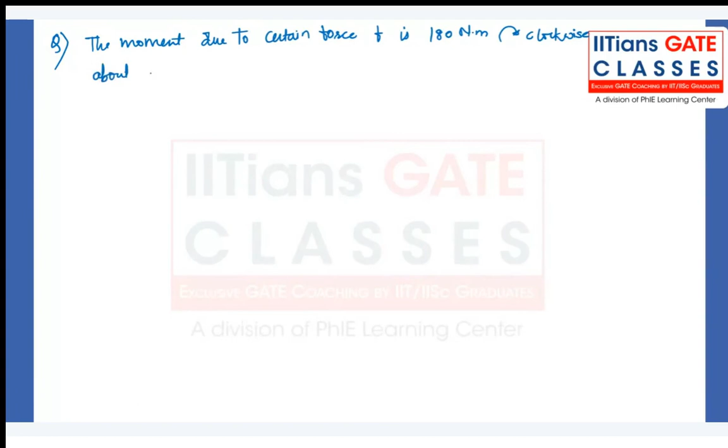Let's take some questions. The moment due to certain force F is 180 Newton meter clockwise about origin, and 90 Newton meter counterclockwise about B, as shown in the figure.

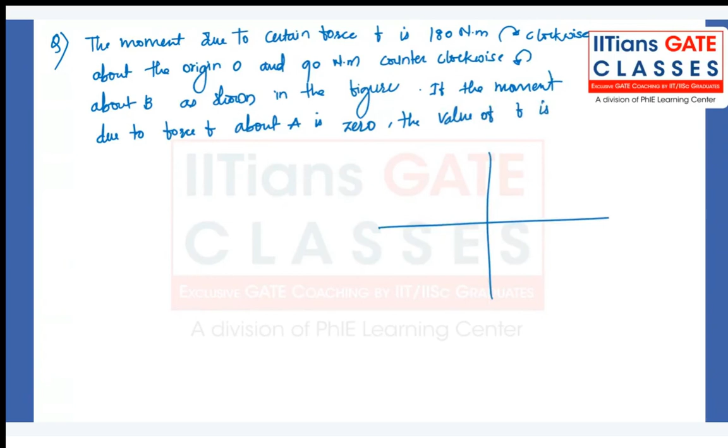If the moment due to force F about A is 0, the value of F is... this is the question, and the figure looks something like this. We have point A here, the origin here, this is the x-axis, this is the y-axis, and point B is somewhere here. B is at a distance of around 6 meters, and A is at a distance of around 3 meters.

I hope with this information you will be able to solve it. Go through the inputs, try to understand the question, and if possible try to draw the figure here to see how force F will look like, where it will be in this figure. Then the problem will be very easy for you.

What they have given is: moment about origin is 180 Newton meter clockwise, moment about point B is 90 Newton meter counterclockwise, and moment about A because of the force is 0. Can you tell me when the moment will be 0? What is the significance of this last input, that moment about A is 0?

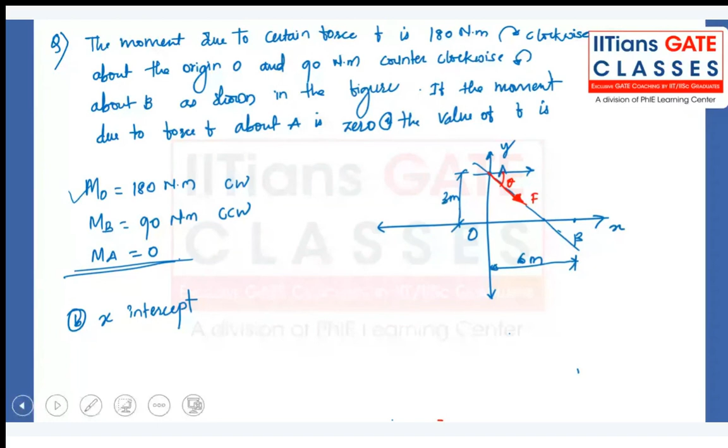What will be the components of this F? The horizontal component will be F cos theta, the vertical component will be F sine theta.

This 180 Newton meter about origin will be because of the horizontal component only, right? So F cos theta, or the horizontal component, let's call it Fx, and this as Fy. So I can say Fx into 3 is equal to 180. And what is this 90?

90 Newton meter is created because of this vertical force Fy, so we should write it as Fy into 6. Then only we'll have the - so if this Fy force, which is acting at 6 meters away from point B, is creating a counterclockwise moment, right? So yeah, that's all.

Yes, also what else have they given? Anything else? Use these inputs and try to solve the problem now.

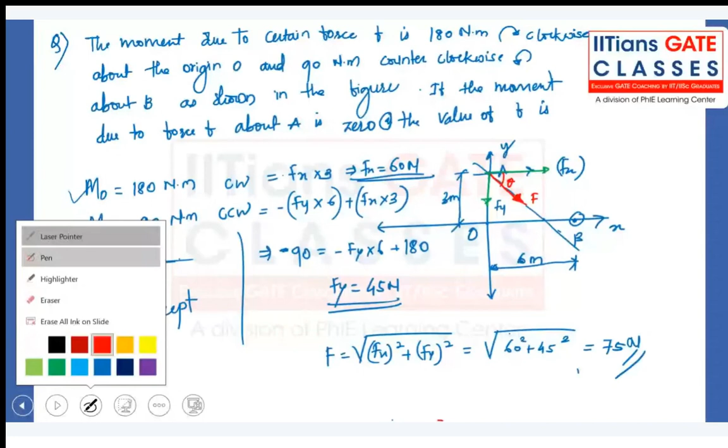Aman, have you understood that the force should pass through point A? Is it clear till this? Yes, okay. Then if you read the question again, what it is saying: the moment due to that force is 180 Newton meter clockwise. So in order to create a clockwise moment about origin, this force has to be on the right hand side of the vertical plane, right? This should be somewhere here, here, or here, right? Then only it will create a clockwise moment about origin. Do you agree till this?

Now, one more sentence they have mentioned: 90 Newton meter counterclockwise moment about point B. So this force has to create a counterclockwise moment about B. Means the line of action of this force should be on the left side of B. If it is on the right hand side of B, what will happen? It will create a clockwise moment. That's why the line of action of the force F should pass through the line joining origin and B. Then only that force will create a clockwise moment about O and counterclockwise moment about B. Is it clear now?

Yes, okay. Now, look at the given. So what I did is I just randomly put F with a theta angle, and Fx and Fy are the horizontal and vertical components of that force. So Fx will create a moment about origin, which is causing 180 Newton meter.

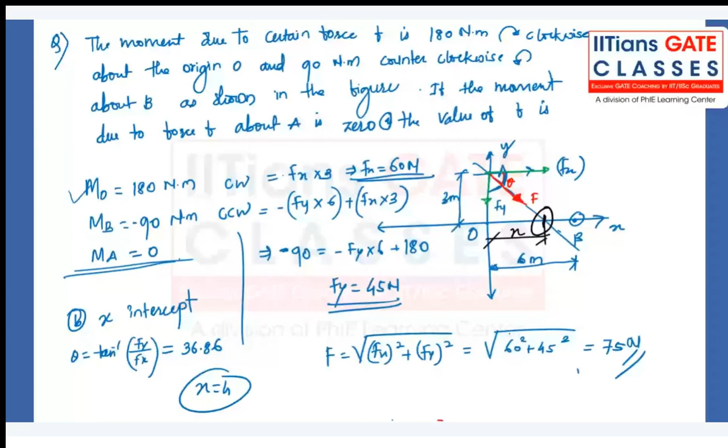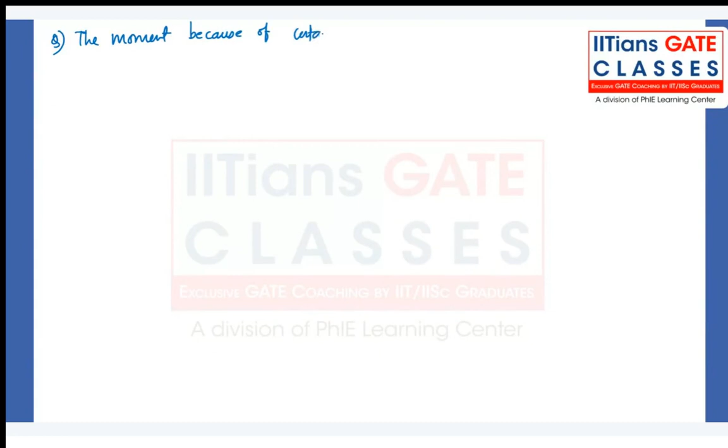Simple, very simple question, 1 mark question. The moment due to a certain force P of 500 Newton with respect to the origin, as shown in figure.

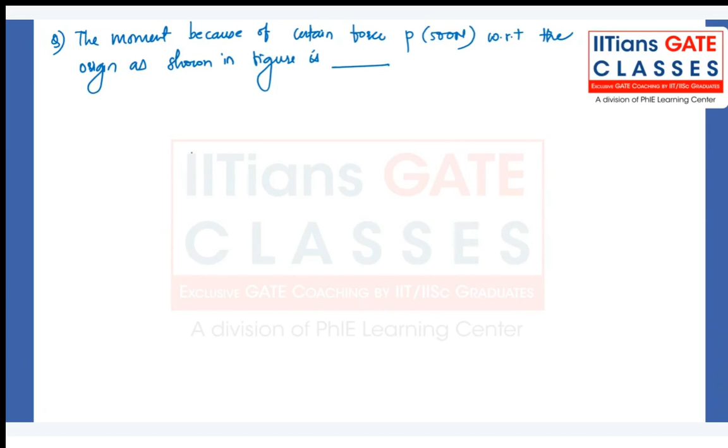Is okay, you have to type the answer. So this is how the figure looks. This is the force, which is 500 Newton, and this is 5 meter.

No, sorry, not this. Let's take it like this. Okay, this is another question I'll write here. Yeah, take this as 5. So find y-intercept.

Okay. Very simple question. We got a force of 500 Newton, making an angle 45 degree with horizontal. What is the moment because of this force P with respect to origin? Quickly tell me the answer.

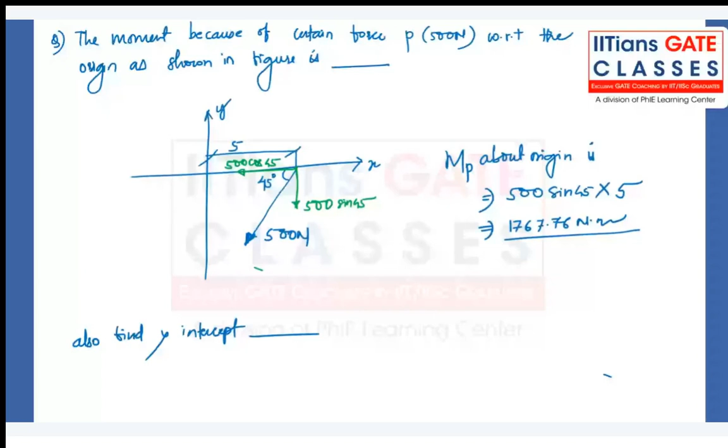Very simple. Means where it will be at the y-axis. That's yes, correct, it's minus 5. It will be this distance, basically minus 5, because this angle is 90, means this also has to be 45, right?

And it means these two sides are of same length. Okay, is it clear to everyone? Any doubt in this question? Feel free to ask, you can directly ask me or you can type your question.

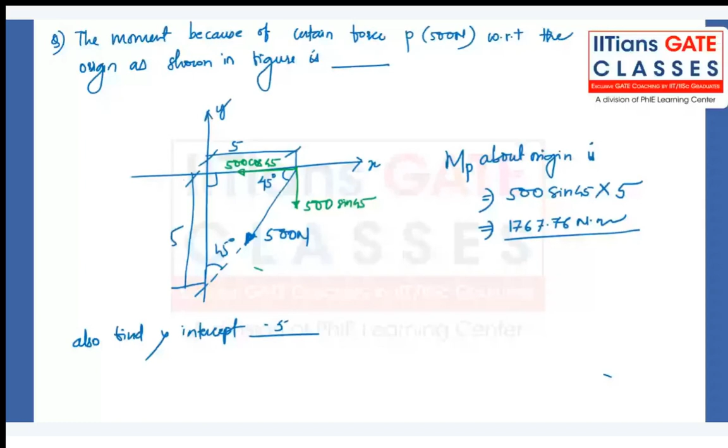Okay, we got one question. Referring to the figure below, if F1 is equal to F2 is equal to 30 Newton, determine the angles theta and phi, so that the resultant force is directed along the positive x-axis and has a magnitude

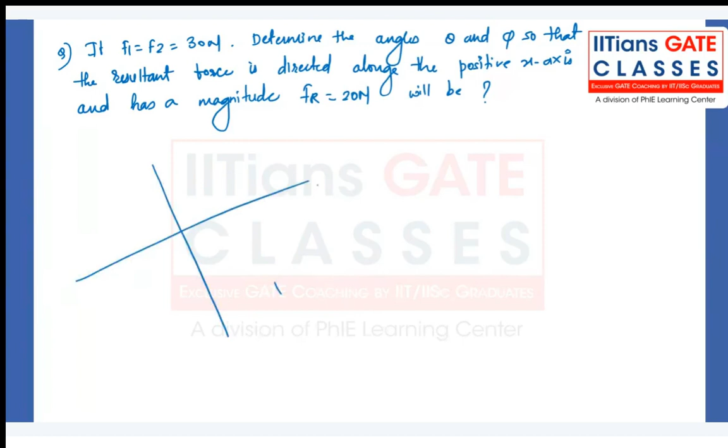of 20 Newton. Okay, figure looks something like this. This is the coordinate axis x and y. You got one force here, theta, phi, 30 Newton, 30 Newton. Okay, I'll not give options to you. You should try to solve it directly.

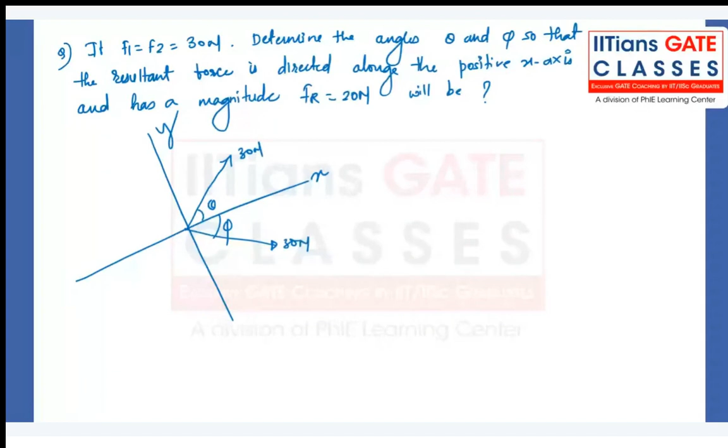So I'll repeat to help you understand. Determine the angles theta and phi so that the resultant force is directed along the positive x-axis. So what they are saying is the magnitude of the resultant is 20 Newton. Okay, this is the given data. So I think 70 point, yeah, close to 70.5 degrees is the correct answer.

Correct, Abhishek. If you look into the question, 30 Newton is the force, right? Both are same, right? Because if forces are same and the resultant is along the x-axis, it means their angles has to be same because of the symmetry in this figure, right? If these two numbers are different, then there is a chance that angles will be different. But now the numbers are same, means angles are also same.

So if you take the component of this 30 Newton about the x-axis, it will be 30 cos of theta plus 30 cos of phi, and that is equal to 20. But as I said, theta is equal to phi, so we can write it as 2 times 30 cos of theta equal to 20. So 30 cos of theta is equal to 10, cos of theta is equal to 1 by 3, and theta is equal to 70.5, I guess, around. Okay, just check 70 point something. Okay, and yeah, this is the final answer.

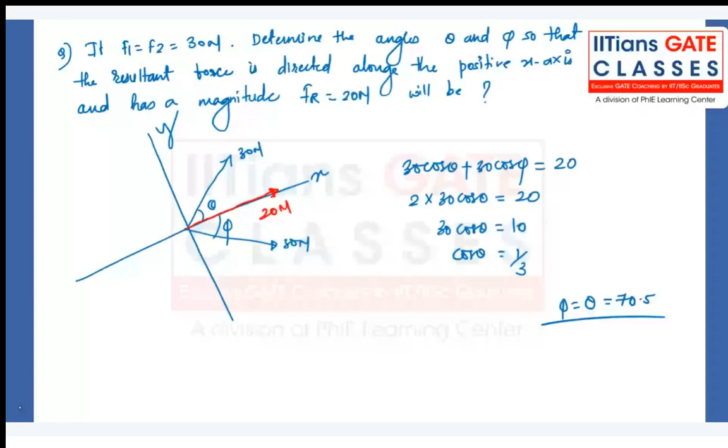A 300 Newton box is held at rest on a smooth inclined surface by a force P, making an angle of 45 degree with the inclination, as shown in the figure.

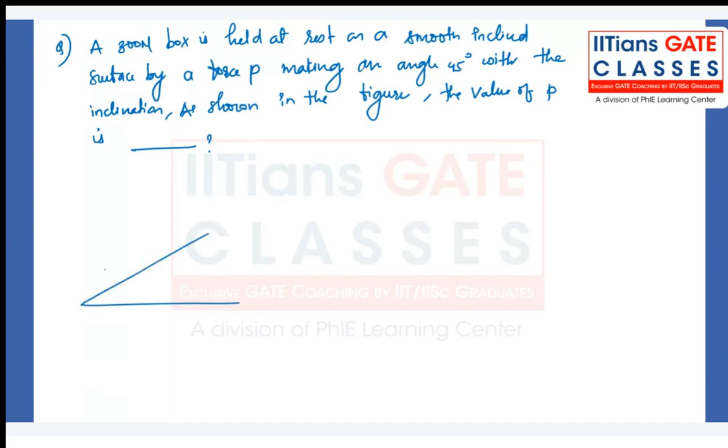Okay, the value of P is... let me draw the figure. So this is 30 degrees, and we got one box here of 300 Newton, and with respect to this we are applying force at 45 degrees. This is the P force, and this angle is 45. Okay, this is the input to you.

Okay, solve it. It is given to you, Sonali. 30 degrees is given to you. 30 degree is the inclination, and 45 degree is the angle of the force with respect to the inclination.

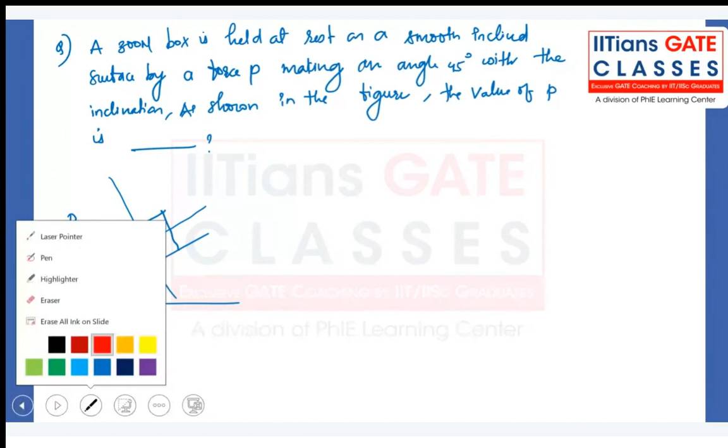Okay, the main forces are like this, P and the weight of the block. So if you solve this, yes, 212.13 is the correct answer. If this is 30, this has to be 30. Why? Because if the angle between two lines is 30 degree, the angle between their perpendiculars is also 30 degree.

Use another pen. This is also 30. So this is W cos of 30, and this is W sine of 30. Okay, then this P will also create two components: P sine of 45 and one component here P cos of 45.

Okay, and what we are saying here is the box is held at rest, meaning it is in equilibrium. So summation of all horizontal forces and summation of all vertical forces has to be zero. So summation of all horizontal forces is 0.

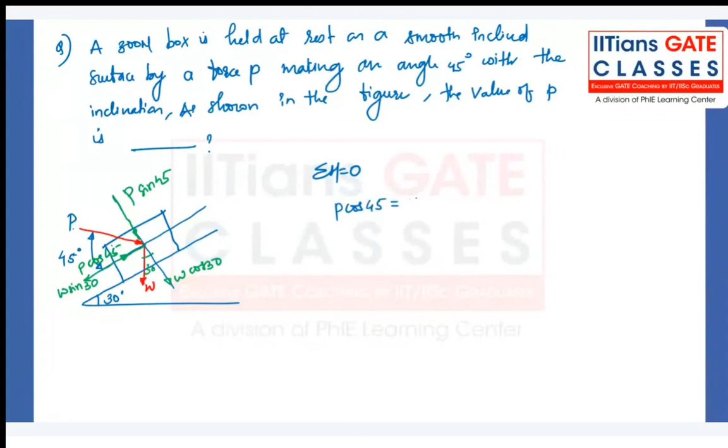So summation of all horizontal forces means what? P cos of 45 is equal to W sine of 30. So we have to calculate the P value, and W value is 300. So 300 sine of 30, that's all. Sine 30 is 1 by 2, so P cos of 45 is equal to 150. So you'll get the value of P.

Okay, can I move towards the next slide? Is it clear?

Okay, let's take another question. We are starting with simple questions. Later on I'll bring a little more complexity to it.

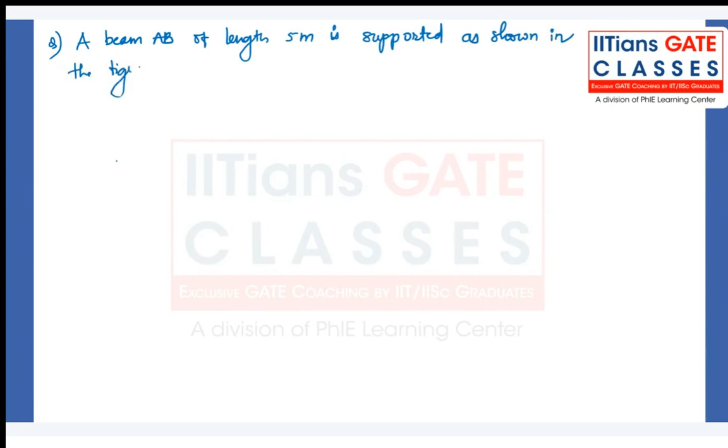So beam AB may be of length 5 meter is supported as shown in the figure, and subjected to the forces at its two ends, A and B. The reactions at the support C and D respectively are...

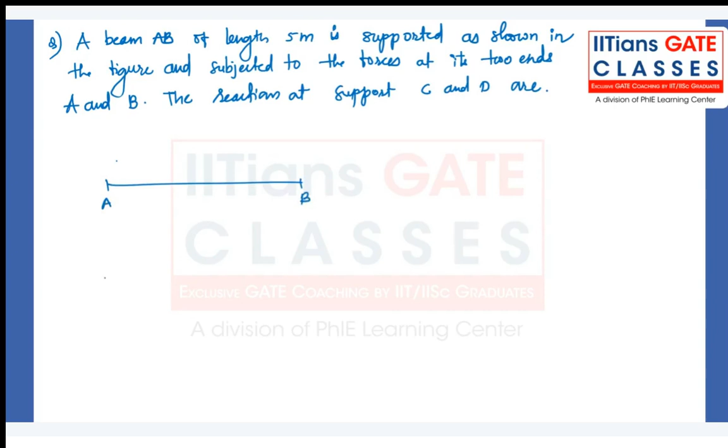Okay, so they have given a beam A, B, and the length of the beam is 5 meter, supported at both the ends. 600 Newton, 600 Newton, and subjected to the forces. Okay, so these are the forces, not the support. We have some supports at point C and D.

Okay, I'll repeat the question. We got a beam AB of 5 meter length is supported as shown in the figure. C and D are the support points and subjected to the forces at the ends. So at point A and B, these are the ends of this beam, and we can clearly see 600 Newton is upward force at A, 600 Newton is downward force at B. The reaction at support C and D are, okay, we are supposed to calculate the reactions at C and D.

Okay, S1 and S2 are the supports, first and second. Yes, distance between C and D is 3 meter.

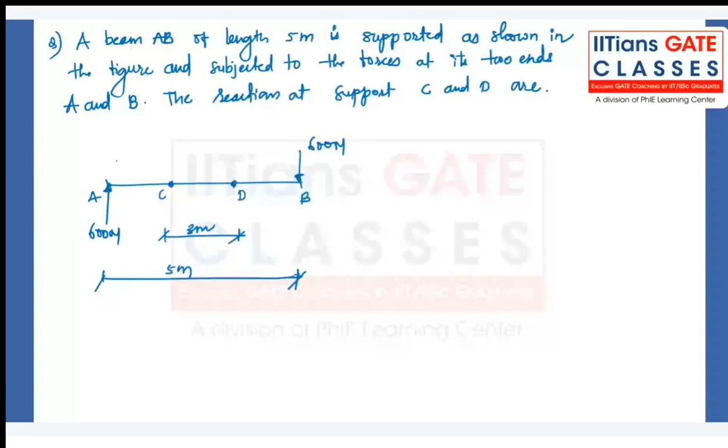See, if you consider the reactions like this, what will happen? Apply the equations of equilibrium, what we'll get is summation of all vertical forces has to be 0, right? Yes, Abhishek, correct answer. So 600 plus reaction at C plus reaction at D minus 600 is equal to 0 as per the equation of equilibrium. So what does it mean? RC has to be equal to RD. The reaction at C and reaction at D has to be equal, but the direction... you can clearly see RC is equal to minus RD, or plus RD. So what should be the value or direction of them? Is it correct if I write it like this? Yes or no?

No, it is incorrect because in this case it will be unbalanced. Both of them will create a clockwise couple, so it is not in equilibrium. The correct figure should be like this.

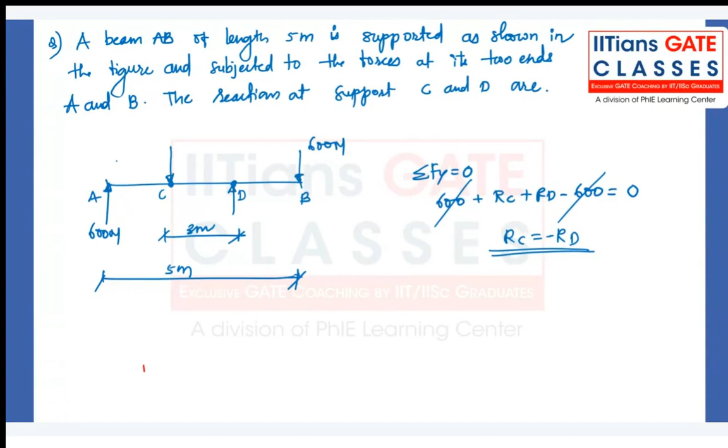So in short, the clockwise couple created by A and B should be equal to the counterclockwise couple created by C and D. Then only this is in equilibrium.

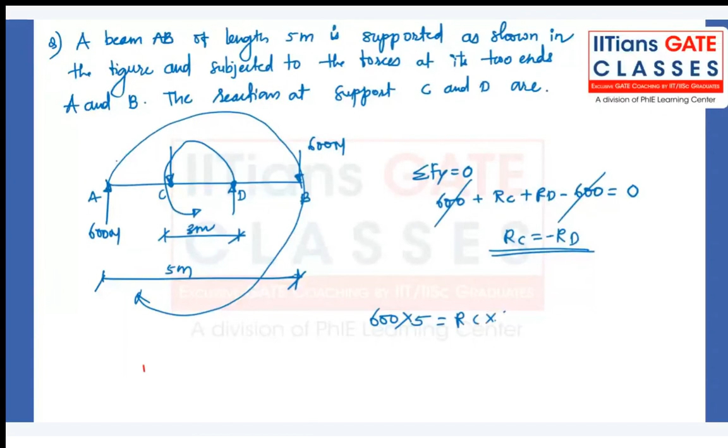Do you agree? So what is the clockwise couple created by forces at point A and B? 600 into 5, and it is equal to the counterclockwise couple created by the reactions at C and D, that is RC into 3 or RD into 3. Hence, the reaction, let's call it general R, is 1000.

RC is downward and RD is upward. RC is 1000 downward and RD is 1000 upward. So the correct answer is 1000.

You should directly type 1000 if the question comes without options. If the question comes with options, you can choose accordingly. Any doubt in this question? Is it clear to you all?

Let's solve some more questions related to beams quickly. All these are previous year questions, mainly 1 mark each.

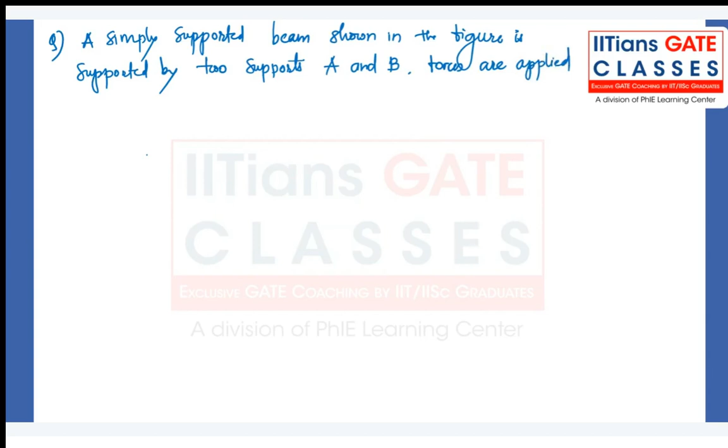A simply supported beam shown in the figure is supported by two supports, A and B. Forces are applied as shown in the figure. Determine the reactions at the supports.

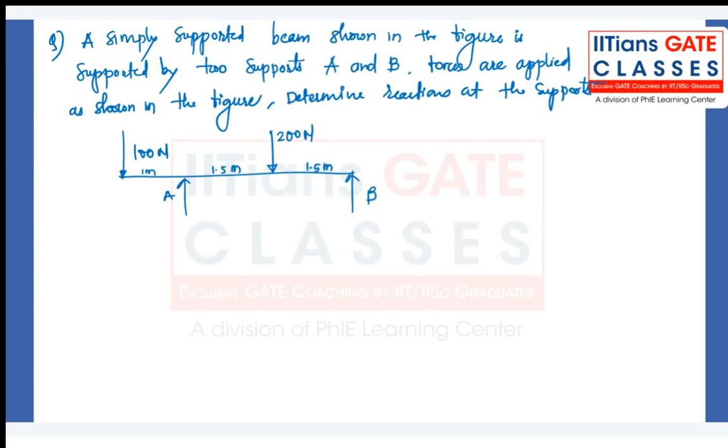Use this input data and figure and try to solve the question quickly. Tell me the value of RA and RB.

A simply supported beam shown in the figure is supported by two supports A and B, and forces are applied as shown in the figure. Distances are also given to you. I don't think this is a difficult problem. Apply the equations of equilibrium.

Summation of all vertical forces has to be equal to 0, right? So RA plus RB is equal to 300, which means 100 plus 200. Write it as equation number 1. Horizontal forces are not there, so you don't need to use that equation of equilibrium.

As the force system here is coplanar non-concurrent, you can also apply moment equations. If you take moment about point A, moment about point A is 0: 100 into 1 is creating a counterclockwise moment about point A, plus 200 into 1.5 is a clockwise moment, and that is equal to reaction at point B into 3.

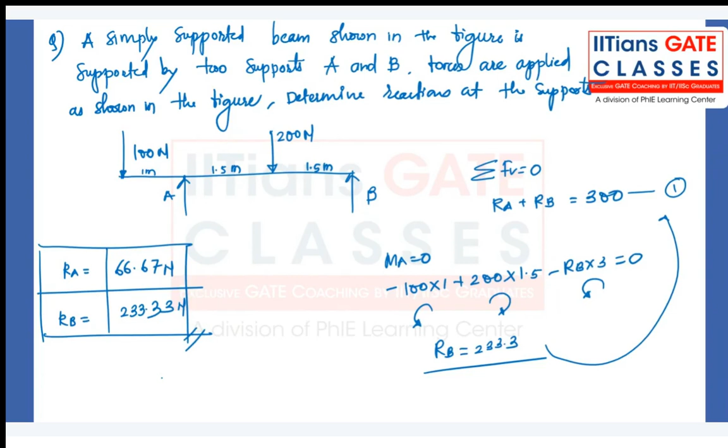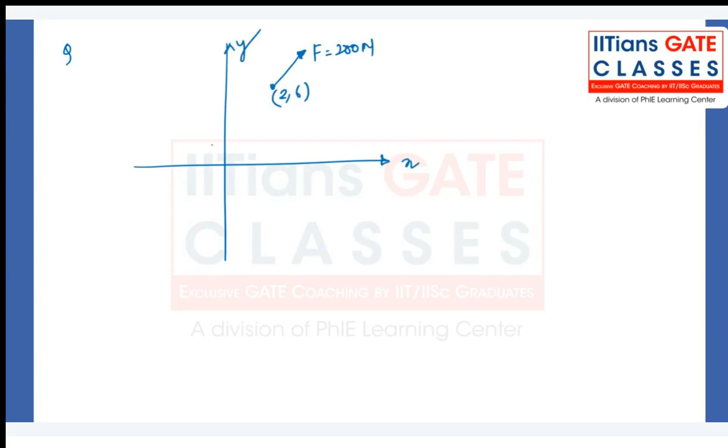One more simple question: determine the moment because of force F about the origin. This is the question.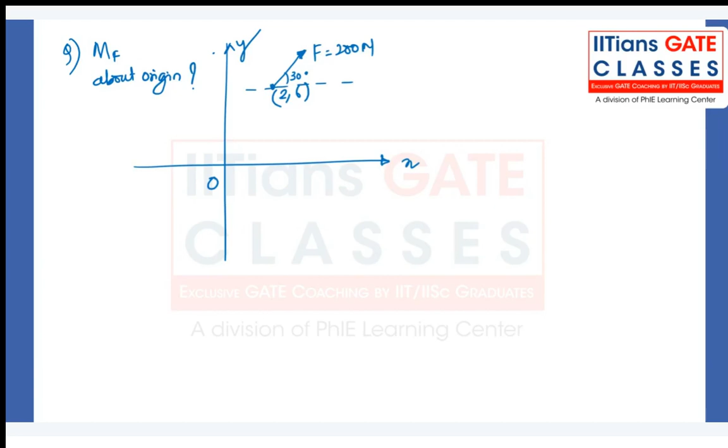You are talking about the previous question, Kanishk. Let's first finish this question and then I'll come to you. Let's solve this first question.

So here the question is the moment because of the force F about the origin. That force is making an angle of 30 degrees with the horizontal, which is at a distance of 2 meters from the origin towards the x-axis and 6 meters from the origin towards the y-axis. Can you tell me the answer?

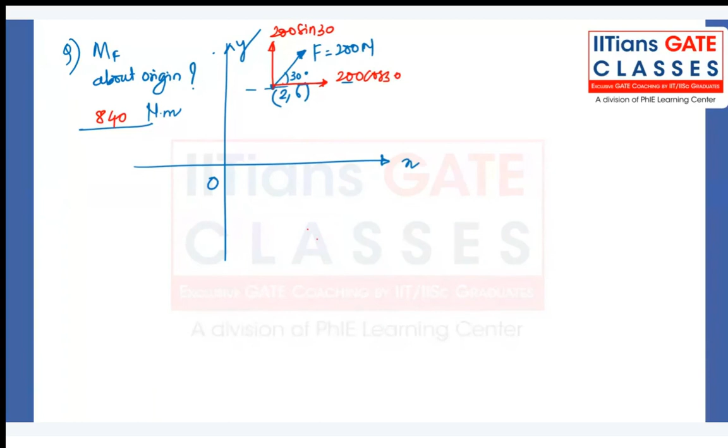Yes, 840 is the correct answer. See, the component of F about the horizontal axis is 200 cos of 30, and we have 200 sin of 30. So the moment because of this about origin is 200 cos of 30 into 6, creating a clockwise moment, minus 200 sin 30 into 6.

You should get 840 Newton meter. I hope it's clear to you all. Can I move to the next slide? Any doubt in this question?

Sorry, it's mistakenly written as 6, it should be 2. Is it correct? Yes, right. Thanks, Sonali.

200 sine, 200 cos of 30: the perpendicular distance for that is 6, and for this force the perpendicular distance is 2. I hope it's clear now.

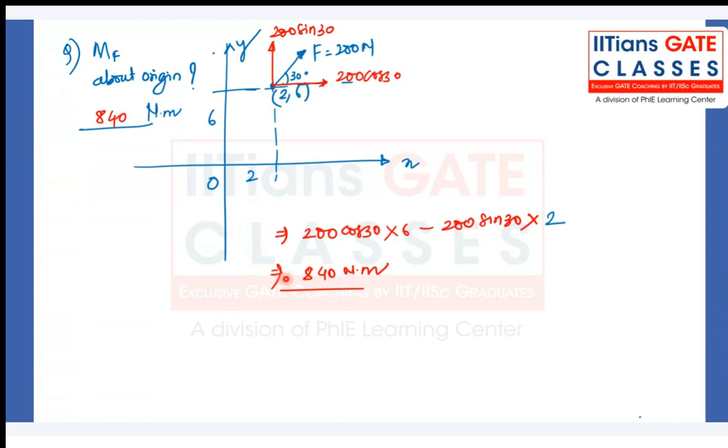Yes, okay. Let's take a question. This is a little bit of a big question. I'll not write it completely, I'll read it and you try to write it. Just the main points, no need to write all the things. Okay, a block of weight

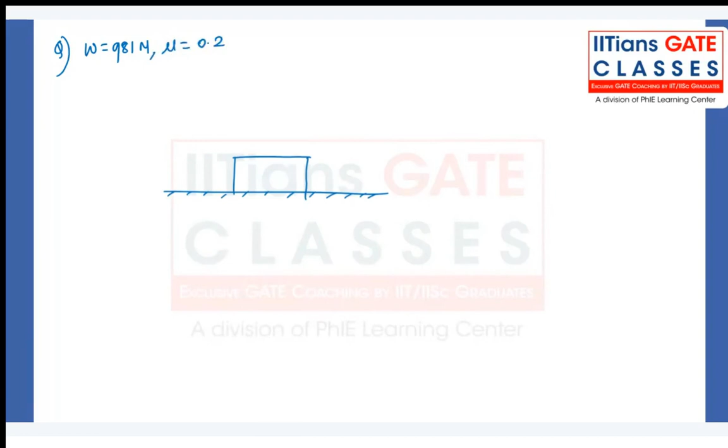981 Newton is resting on a surface as shown in the figure. The coefficient of friction between the block and horizontal surface is 0.2. The vertical cable is attached to the block, providing a partial support as shown in the figure. So we got a cable attached to the block vertically as shown in the figure in order to provide the partial support.

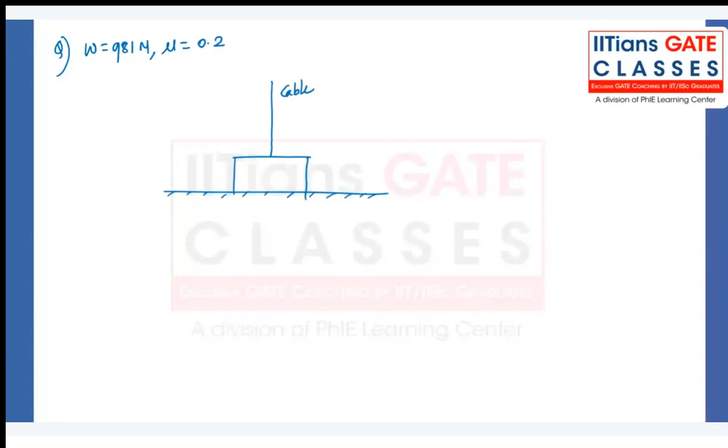A man is pulling the block horizontally with a force of 100 Newton. What will be the tension in Newton in the cable if the man is just able to move the block towards right.

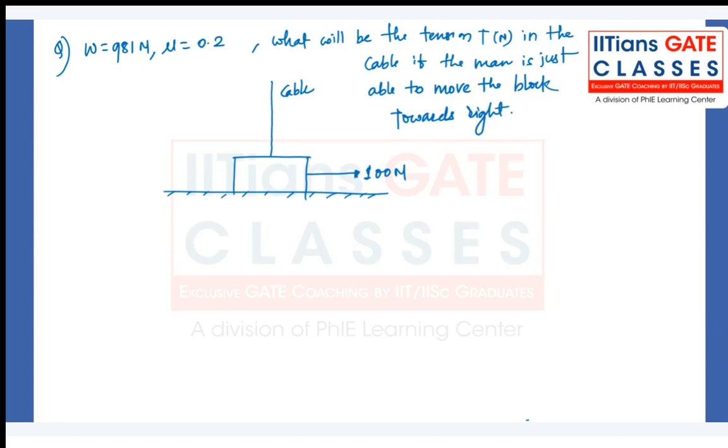Okay, I'll repeat the question, listen carefully. We have a block weighing 981 Newton resting on a surface. The coefficient of friction between the block and the horizontal surface is 0.2. We have attached a vertical cable, which is providing partial support as shown in the figure. And a man is pulling the block horizontally with a force of 100 Newton as shown in this figure. What will be the tension in Newton in the cable if the man is just able to move the block towards right? Is this question clear to you all?

Yeah, okay. So what is the benefit of this cable? Cable is providing partial support. If the cable is not there, then what will happen? We have to apply more force in order to move the block. And what is its value? It's clear cut, the value will be mu into n, right, because the friction force will be mu into n.

So 981 into... assume that you don't have the cable for the time being, just to explain you this concept in more detail. Assume that you don't have the cable here, so only we have one force acting towards the right hand side in order to move the block. So can, in that case, will that be 100 Newton or more than that? Okay, this is a force F.

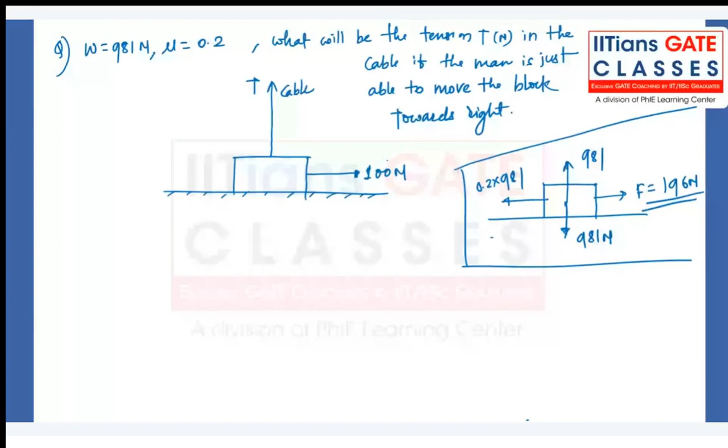But in this question we are attaching a cable, and that is helping us to give partial support. So we don't need 196, you don't have to apply 196 Newton force in order to move the block towards right, 100 Newton force is sufficient. Okay, so given that, you have to calculate the tension in the cable. No, Sonali, it is not given as 196, I am helping you understand what is the benefit of the cable here, what value the cable is adding.

Okay, see, if you don't have the cable, then this is the situation: in order to move the block, you have to apply force more than 196. But in our question, 100 Newton force is just sufficient to move the block because of the partial support provided by the cable. So this is just to help you understand the question and calculate the value of tension in the string.

Yes, Abhishek, your answer is correct, 481 is the correct answer. If you draw the free body diagram, we got tension, we got the normal reaction in the upward direction, and we got 981 Newton weight in the downward direction. We got 100 Newton force in the rightward direction, and we got a frictional force F in the left direction. Okay, so let me write that.

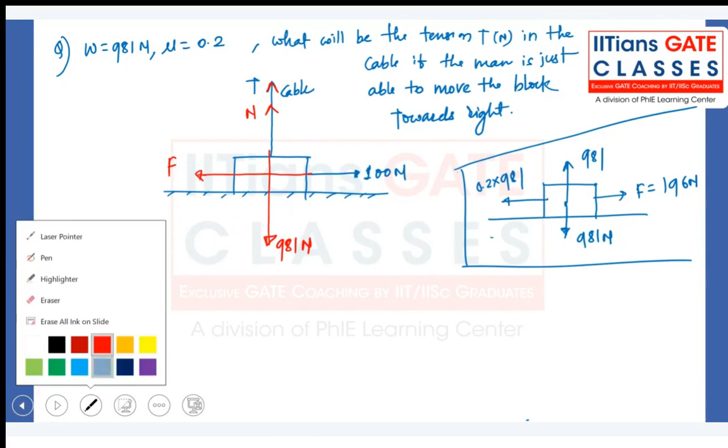Sham is asking how tension is helping to move the block right. If the block has a weight of 981 Newton, its normal reaction will also be 981 Newton. Do you agree?

So if 981 is the normal reaction, the frictional force will be 0.2 into 981. Is it correct? And the value of this is what? 0.2 into 981 is 196.

So it means you need at least 196 Newton force in order to move the block towards right if the string, or the cable, is not there.

But now if we are attaching a cable to the block, they are saying that 100 Newton force is just sufficient to move the block because the cable is lifting the block slightly upward. Because of that, the frictional force between the surface and the block will reduce. Is it correct? Are you following?

Let me explain how I calculate the value of frictional force in this case. What is the value of n? If you do the summation of all vertical forces equal to 0, T plus n equals 981 Newton. And what is the value of n here?

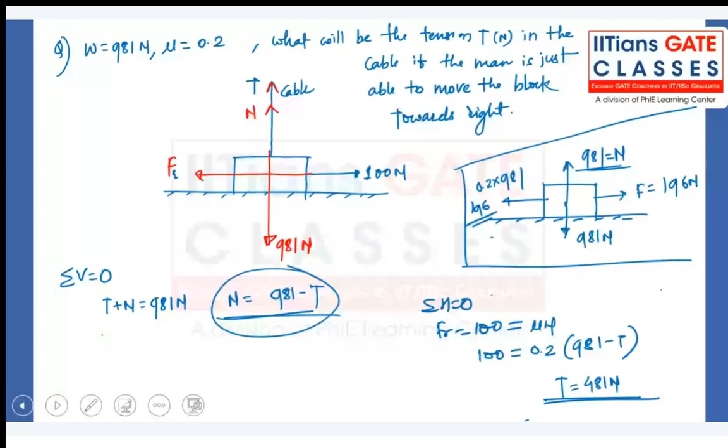Okay. No problem, Sonali, it's good that you understood it. If a similar question you get in future, you know how to deal with it, right? So no need to worry.

Let me give you some more questions. A little bit difficult, I try to think on it. Okay, just for your understanding.

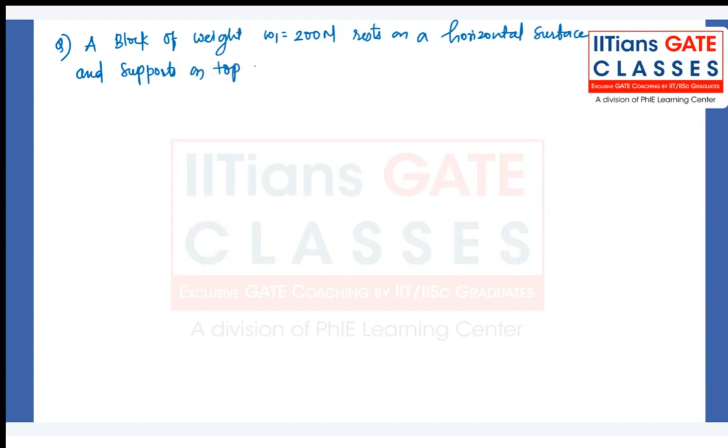A block of weight W1 equal to 200 Newton rests on a horizontal surface and supports on top of it another block of weight W2 equal to 50 Newton.

As shown in the figure, let me explain. We have one block, and we have one more block on top. W1 is equal to 200 Newton, W2 is equal to 50 Newton.

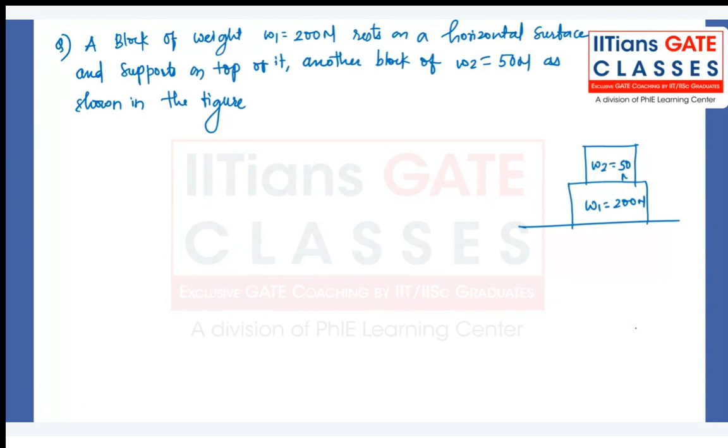The block W2 is attached to a vertical wall by an inclined thread AB.

The magnitude of the horizontal force applied to the lower block, as shown in the figure, that will be necessary to cause slipping is...

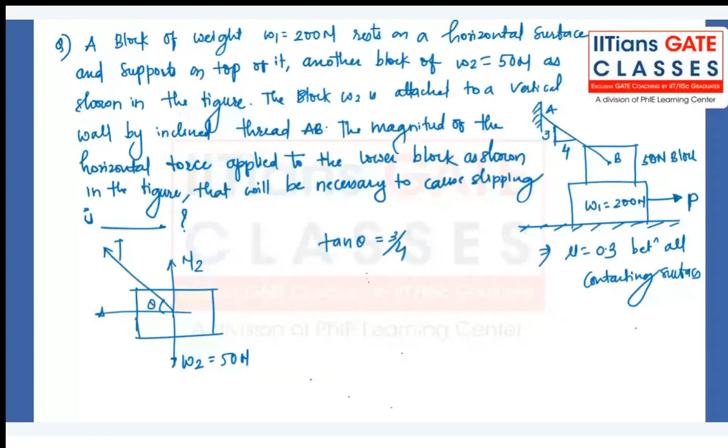Because it's a second block, we have one string in this direction, which is making an theta degree with the horizontal. So the horizontal component of that tension will be Tx and vertical will be Ty. And this theta you can calculate. Tan of theta is equal to 3/4. So theta is equal to tan inverse of 3/4, and that is 36.86 something you'll get.

Okay, now directly I will write the components, not the T, so you will understand it clearly. So this is T sine of 36.86, the component of tension in the vertical direction. The tension component in horizontal direction is T cos of 36.86.

See, because of this force P, the block will move towards right. So the frictional force on this block in this direction, do you agree? In the block of weight W1. But on block B, which is our second block, of weight W2, which is equal to 50 Newton, frictional force will be in this direction, because W1 and W2 are connected. So in that case, the frictional force is in the right hand side direction. So here, the frictional force I should write towards right hand side, and that is, let's call it F2. F2 is the frictional force between the blocks W1 and W2.

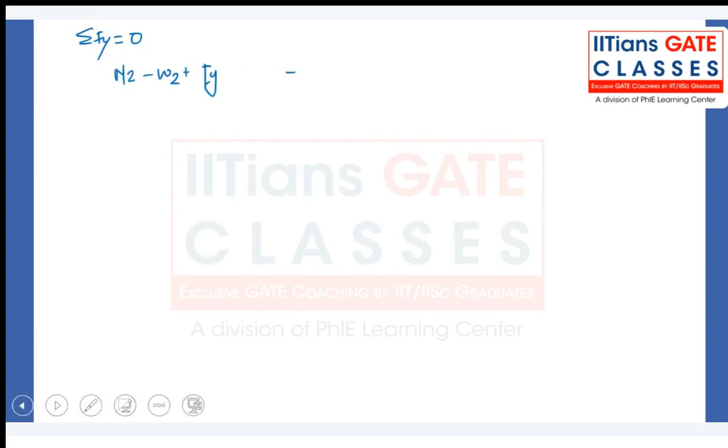Is equal to 0. N2 minus W2 is 50. Ty is T sine of 36.86, so it is 0.6 times T is equal to 0. So from this you will get a relationship. Okay, let's keep it as it is for the time being. Call it equation number 1.

Okay, we got a question from Harsh about friction again. Okay, so I'll repeat, Harsh. So this is one block, and this is another block we are keeping on it. You are able to move this block, and this is your surface. If you are able to move this block in the horizontal direction, the frictional force on the block will be in this direction. Do you agree?

Now focus on these two blocks, forget about this one. This block is moving in the right hand side direction now. So what will be the frictional force on this block? See, on this block it is in this direction, but on this block, slip is occurring meaning the block on the downward side is moving in the right hand side direction, and the upward block moves in the left hand side direction, right? So in order to have balance, your frictional force here is in this direction. Okay, so the magnitude will be same, just the direction will change depending on which free body diagram you are considering. Yep.

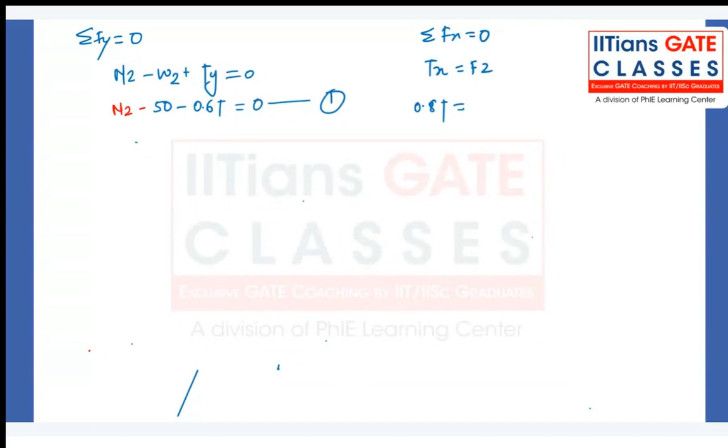And what is F2? F2 is mu times N, and the N we already got. So N2 is what? N2 is 50, sorry, this is minus 0.6T, right? So F2 is 0.3 into 50 minus 0.6T. Okay, 50 minus 0.6T Newton. 0.8 T is equal to 0.3 into 50 minus 0.6 times T.

So if you solve this, you will get the value of tension, 15.3 Newton. And if you put it into this equation, you will get the value of N2, and that is 40.8 Newton. And if you know N2, you will get F2 as well. So that is 0.3 into N2, and that is 12.24 Newton.

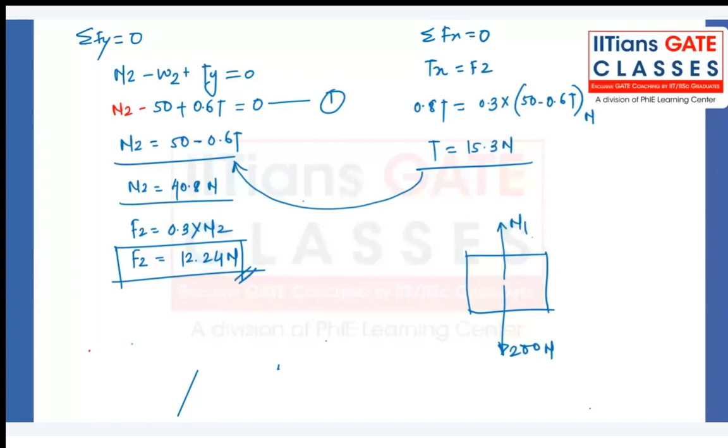Now we can proceed towards the free body diagram of the bigger block, which is 200 Newton weight. Here you will have a normal reaction N1. Also, the weight of the block which is kept on this will create again one reaction. Let's call it N2.

We have one force which is horizontal, that is P. Because of this, we have F1 force. With respect to the surface, we have frictional force F1 in this direction, and friction between the blocks will be F2, in this direction. So this is the free body diagram of the block at the bottom, the bigger block.

From this we got the value of F2. We don't know the value of F1 here. You know the value of N2, that is 40.8 Newton. You can calculate the value of N1 from this. If you apply summation of all vertical forces equal to 0, N1 you will get as 200 plus N2, so that is 240.8. So if N1 is 240.8, F1 is calculated using that, and that is equal to 72.24.

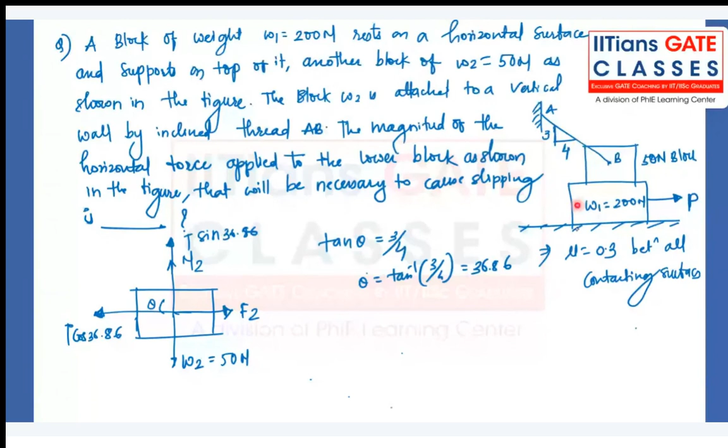Why will it not create full 50 Newton? Because it is attached to a string, so the whole 50 Newton force will not be applied fully on block W1. Some part of it will come here because of the string. If the string is not there, then the whole 50 Newton reaction will be applied by block B on block A.

So that is the reason N2 is 40.8, which is the reaction of the smaller block on this bigger block, and N1 is the reaction because of the ground on the bigger block. So I hope you understood 200 Newton, N1 and N2 direction. P is also given to you, already given in the figure. So if the block is moving in the rightward direction, the frictional forces will be in the leftward direction, and that's why F1 and F2 are in the opposite direction to it.

Shrujana, is it clear to you? So from the first calculation we got the value of F2, and here we are calculating F1 and just adding them to get the value of P. I hope it is clear to you all. A little bit difficult, but if conceptually it is clear to you, you may not face any issues in future. Any doubt, feel free to ask.

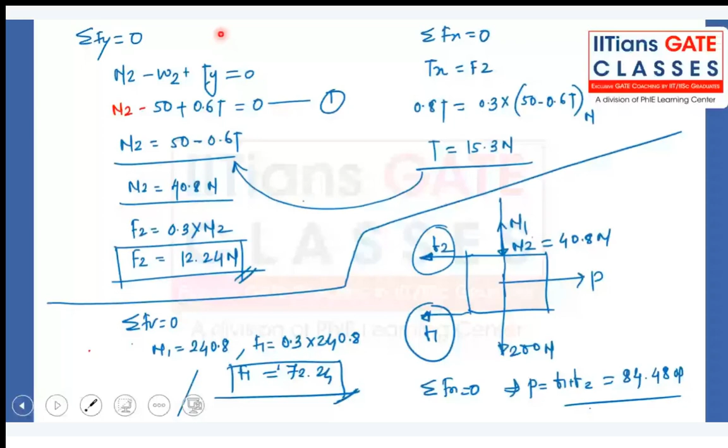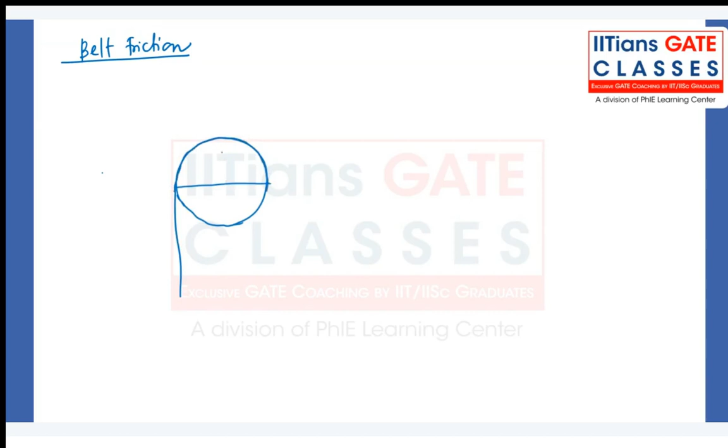A little bit of theory I'll explain here: belt friction. I have explained all the friction part, but this small part remains. Suppose you have a pulley, and a belt is wrapped from this pulley like this, with T1 and T2. How to find T1 and T2?

T1 is the high tension side and T2 is the low tension side. If this pulley is rotating in the counterclockwise direction, the arrow indicates the high tension side. If it is rotating in the clockwise direction, then the arrow will indicate the high tension side. So whichever direction it rotates, that side is higher. Assume here it is rotating counterclockwise, so T1 is the high tension side and T2 is the low tension side. So T1 by T2, you know this relation.

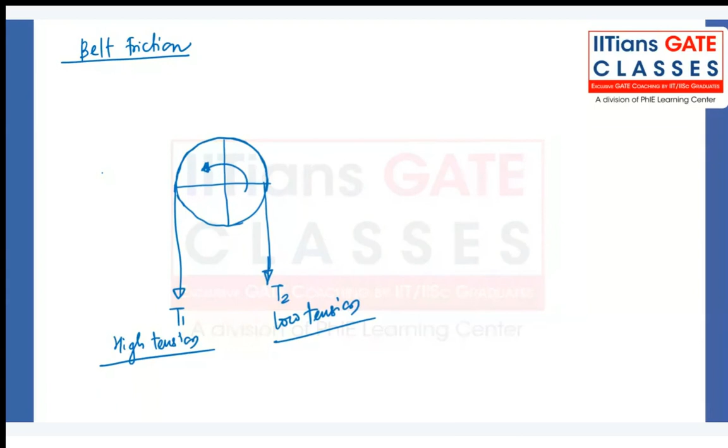That is what I'm trying to explain here: how the ratio of T1 and T2 is related to each other. Tension on the high tension side divided by the tension on the low tension side is equal to e to the power mu times beta, where T2 and T1 you already know. The value of mu is the coefficient of friction between the belt and the pulley, and beta is the angle of contact.

Let's call it beta, angle of contact, or you can also call it the lap angle. Okay, in radians.

So in this question, what is the angle of contact? It is complete 180 degrees, right? So this is the total angle of contact. So entire 180 degrees, this belt is in contact with the pulley. That's why in this case, I will say pi is the angle of contact for this figure.

But if you get this kind of figure, in this case you may have lesser contact, let's say maybe 90 degrees or so. Is it clear? Is this part clear?

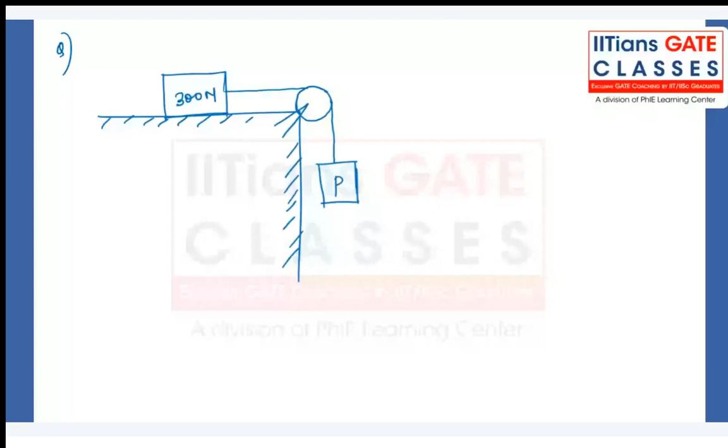Can you calculate the value of P here? Consider the coefficient of friction is 0.3. Lap angle is 90 degrees. And find the value of P. The coefficient of friction is 0.3 for all contacting surfaces.

Direction of motion, obviously we are not applying any force to the horizontal block in the left hand side direction, right? So if P is able to just move the block of 300 Newton, because of gravity it is coming down and this is going in the right hand direction. So basically it is rotating like this. Friction, coefficient of friction is in between all contacting surfaces, not only the pulley but also the surface. All contacting surfaces means you should consider everything, ground as well.

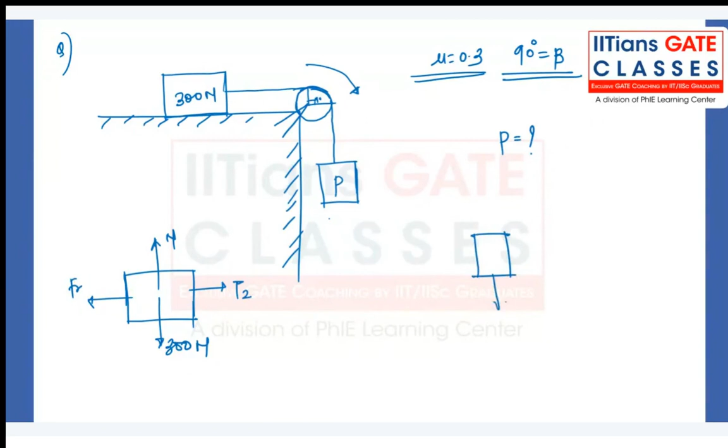And one more relation, T2 by T1. Okay, let me just help you with this. T2 by T1 is equal to e to the power mu beta if T2 is greater than T1. And you can write it as T1 by T2 is equal to e to the power mu beta if T1 is greater than T2. So whatever you are assuming, on that basis it will change.

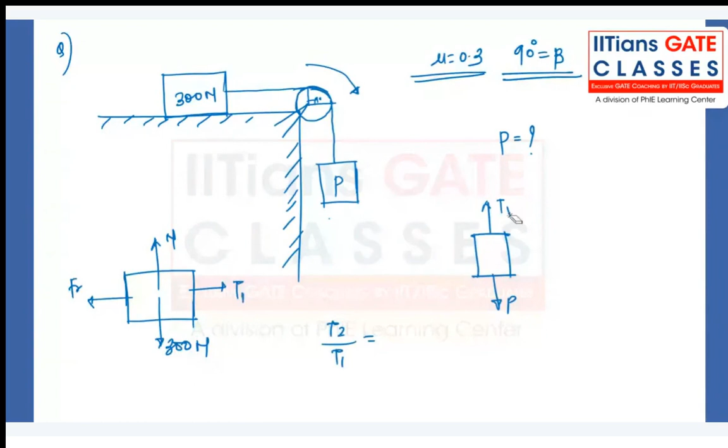So let me just write it in a different way to make you understand here. T1 is this, for example. This is the first diagram and this is the second, for example. Okay, and you are calling it T1 and this T2. Forget about which is max tension. You just focus on the direction in which the pulley is rotating. Pulley is rotating in this direction as shown, right? It means the tension on the side where the arrow is, that is the high tension side. So T2 is greater than T1 in this case.

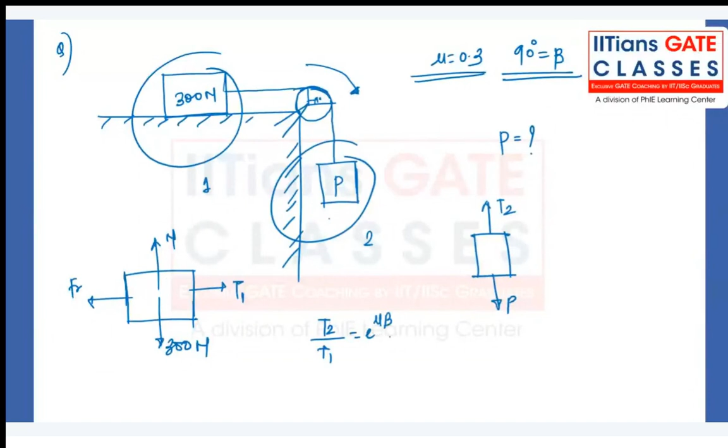So you should use the relationship T2 by T1 is equal to e to the power mu beta. So it is e to the power, mu is 0.3, beta is pi by 2. So you'll get a relationship between T2 and T1. Let's keep it as it is for now, for the time being.

Let's get one more relationship between them. So here N is also equal to 300 Newton. What is the frictional force? Frictional force is equal to 0.3 into 300, which is equal to 90. It has to be equal to T1, right? So if you put T1 is equal to 90...

In this, you will get T2 as 90 into e to the power 0.3 into pi by 2. And you will get T2 as 144 Newton. Is it clear to you all? Any doubt?

Abhishek, 56.25 is for what? I think it's incorrect. If you're talking about T1 and T2, 144 is the correct value for T2. T1 is 90.

Others, do you have any doubt? Sir, excuse me. Can I consider... your voice is cutting, sir. Can I consider it equal to e to the power mu beta? Can I consider T1 by T2 also? Yes, you can consider both. Let me just show you.

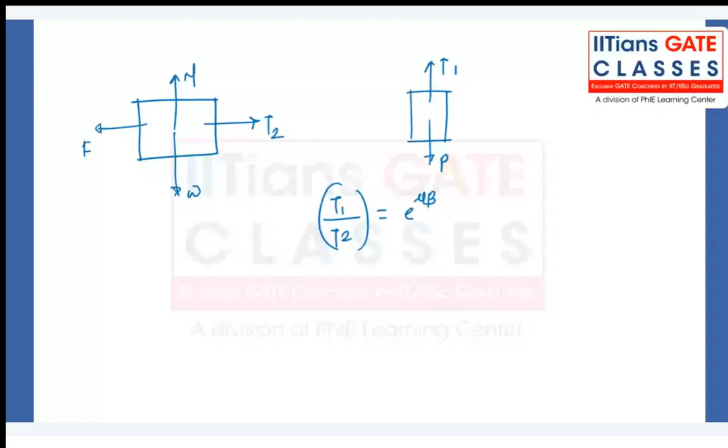We got a question from Raj. Excuse me sir, here we don't know which is maximum. Then how? We know the direction of this is in this direction. I told you, right? The direction I have given indicates the max tension side.

But if it's not moving, sir... if it is not moving, just stationary, in that case also, let me give you another example. I'll add one more difficulty to it, one more force in the next question to make it understandable. Here the P is about to move the block in the rightward direction. Even if it is not, is there any other force? Do you agree P is trying to pull this even if you don't apply the force? So if it is applying that force, that will be the tension side, because the entire system is trying to move towards the right hand side, and that is why this is the high tension side. Always try to draw the arrow in the direction of motion, and the arrow indicates the high tension side.

We got one question from Sham: how does the tension differ in the same string? The tension is different in the same string because of the friction. If you don't have friction, the value of mu is 0, then T1 will equal T2. If you consider a frictionless pulley, you are right that there will be no difference in the tension. But here it is a pulley with friction, and that is causing the difference in tension in the same string. Are you following?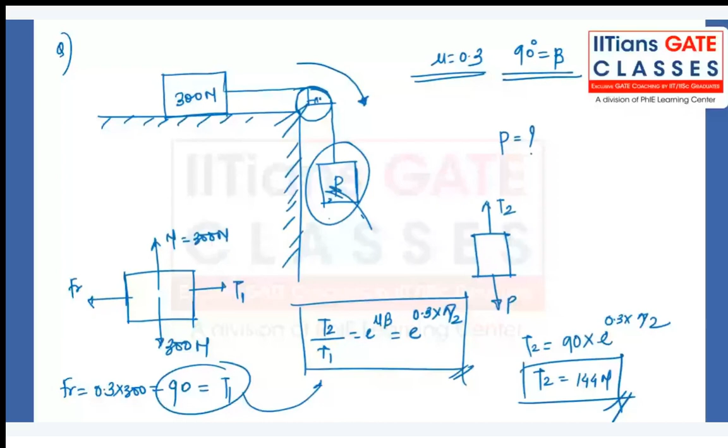Okay, if no doubt, then we'll proceed. Same question. Try to solve it. Okay, this way.

Okay, this is a 200 Newton block, and let's say it has a 300 Newton block, and we are applying a force P here. The question is, what is force P? What value of force P is required to move the 300 Newton block from right to left? Mu is equal to 0.3 for all contacting surfaces.

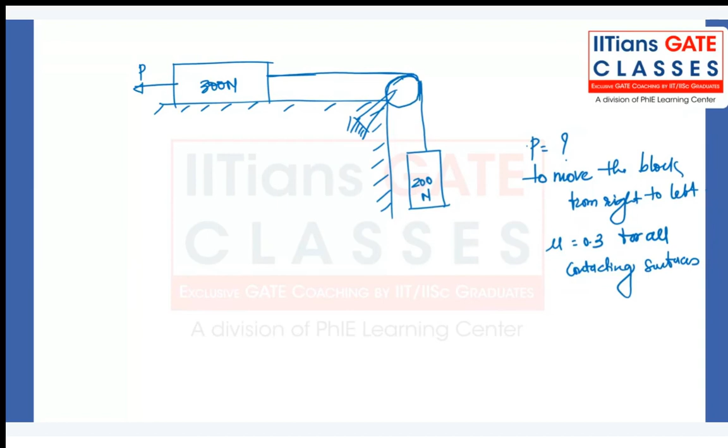Okay, things are little different now. Feel free to ask any doubt, but beta is same as previous question, 90 degrees. See, in this kind of condition, generally it is 90 degrees. Same question as previous - I just made that block into another block of 200 Newton and applied force P.

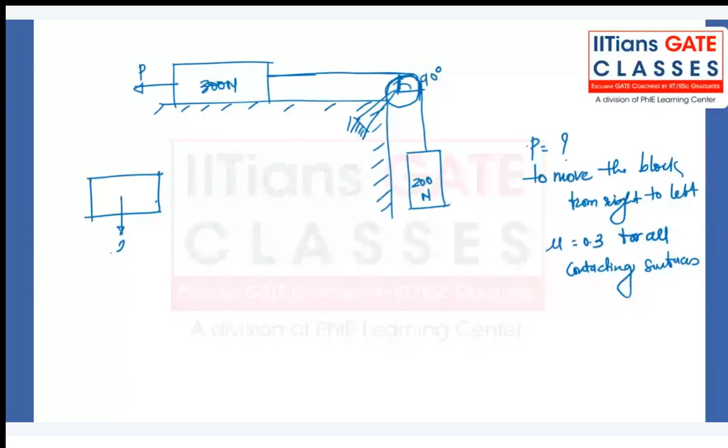No, 215, 230, no, incorrect. See, 300 Newton downward, upward is normal reaction, right side is tension. We got a force P in this direction, and frictional force will be in this direction. So the value of N is 300 for the free body diagram of the first block. Frictional force is 90, so P is equal to frictional force plus tension. This is moving in this direction, I'll call it T1.

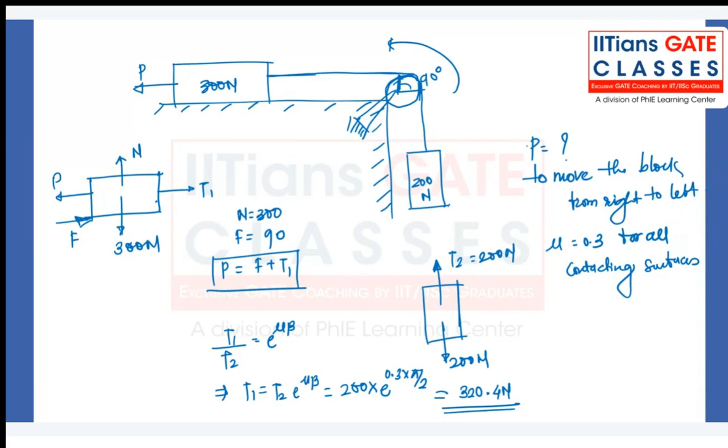Now about the second block. 200 Newton is a downward force, so the upward force in this case is T2, and the value of T2 is also 200 Newton. You know T1 by T2 is equal to e to the power mu beta. Yes, 410 is the correct answer, most of you are typing it. So from this we'll get the value of T1 as T2 into mu... 0.3 into pi by 2... .4 Newton. Okay, so if you put it here, 320.4 plus frictional force, that is 90, that gives 410.4 Newton.

Okay, I hope it is clear. Feel free to ask if you have any doubt.

See, Harsh, in the question itself it is given. Try to go through the question carefully. What is the value of force P to move the block from right to left? So move the block 300 Newton from right to left means the direction has to be like this, right? Are you following? If you want, I'll read the question again: in this figure, what is the value of the force P in order to move the 300 Newton block from right to left? Consider mu is equal to 0.3 for all contacting surfaces. Okay, no problem, so I hope everyone understood this question.

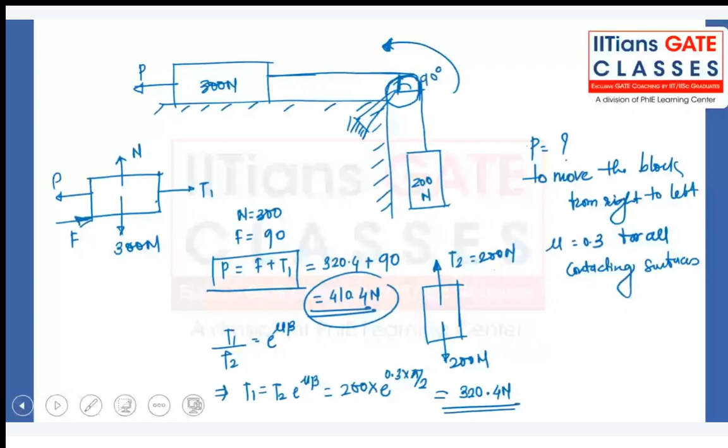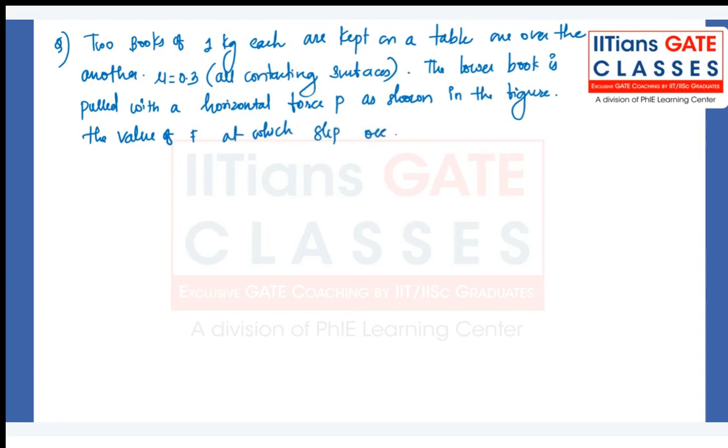Let me give you another question. Two books of 1 kg each are kept on a table, one over the other. The coefficient of friction on every contacting pair is 0.3. The lower book is pulled with a horizontal force P as shown in the figure. The value of F at which slip occurs between the two books is...

Okay, this is your homework question. You try to solve it whenever you have free time, and if you feel difficulty, I will help you to solve it. So the question here is we got two books of 1 kg each, and we are applying force to the book which is kept at the bottom.

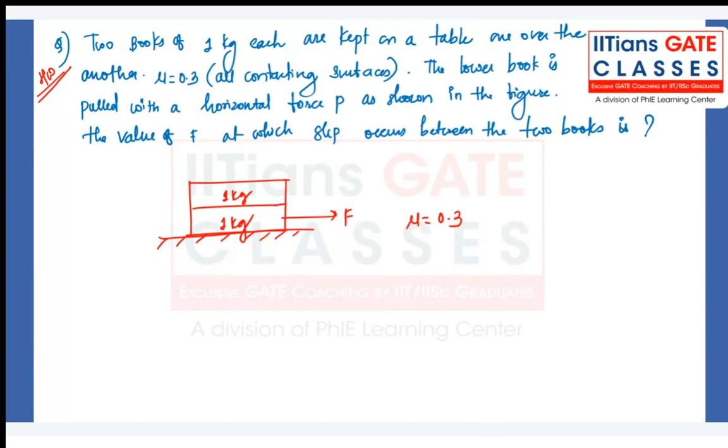Two books of 1 kg each are kept on a table, one over the other. The coefficient of friction on contacting surfaces... the lower book is pulled with a horizontal force P as shown in the figure. The value of F at which slip occurs between the two books is... the final answer in this case is 8.83 Newton, you should get it. This is your homework question, you try to solve whenever you have free time.

This is same as what we have solved before - two blocks kept one over the other. That's why I'm not solving it here. I want you to solve it first. Try on your own and come back to me if you face difficulty. If majority of the people are not getting it, we'll solve it in the next session. But I don't think it's difficult for you as we have already solved a similar question before. If you have any doubt, feel free to reach out to me on WhatsApp.

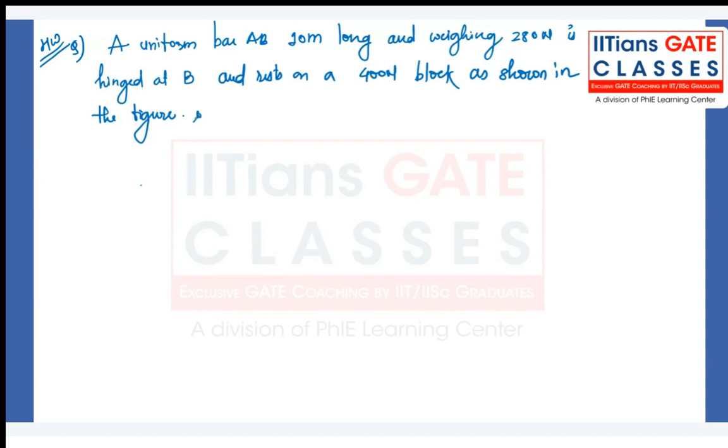the horizontal force P required to start moving the block is asked. Block means the one which is 400 Newton block. Figure looks like this: we have a block somewhere here kept on a surface, a 400 Newton block.

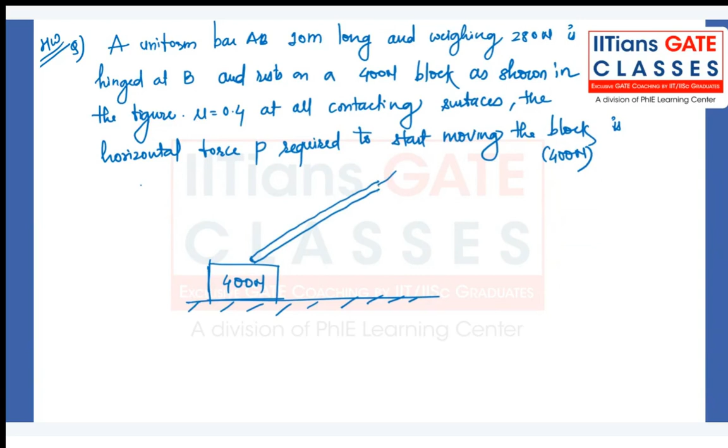Okay, I'll repeat the question, listen carefully. Here I'll give the answer: P is equal to 320 Newton.

Uniform bar AB of 10 meter long, so length of the bar is 10 meter, and weighing 280 Newton, rests hinged at point B as shown in the figure, and rests on a 400 Newton block shown here. Mu is 0.4 for all contacting surfaces. The horizontal force P required to start moving the block is asked.

So if the question is just like this, without this uniform bar, how much force P we need in order to move the block? It is 0.4 into 400, so 160 Newton force is required in order to move the block if this bar is not there.

But we are putting a bar on it, so we are adding more restrictions or more opposing force for the movement of the 400 Newton block, right? So with that condition, the load will be more than 160, so you have to calculate it, and you should get it as 320.

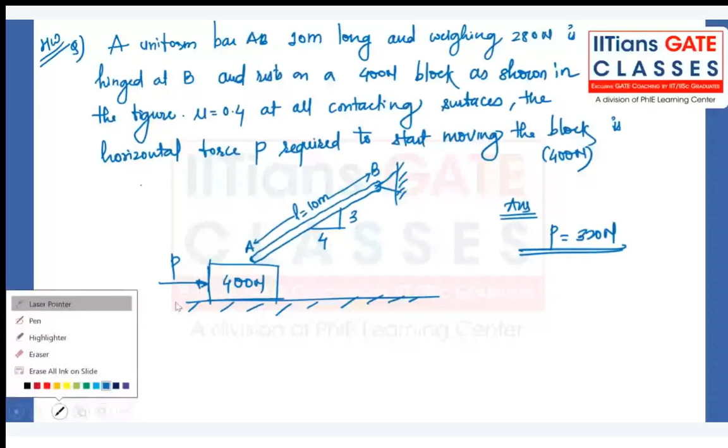If you want to understand it, you can practically take an example: take a bar, hold it on a wall in one hand, put its other end on a book, and try to push the book. You will see that we are not applying any force from right to left in this direction. If we apply force from right to left, then the rod will move. In this case, as in the figure, we don't have that kind of force, right? We are applying force from left to right, so that is the reason the uniform rod will not move.

You work on it, Sham, that is homework question for you. If I give all hints, then you won't think on it yourself, how to put the reactions and solve it. Try at least for some time, and if you still find it difficult, I will help you. I want you to spend time on it.